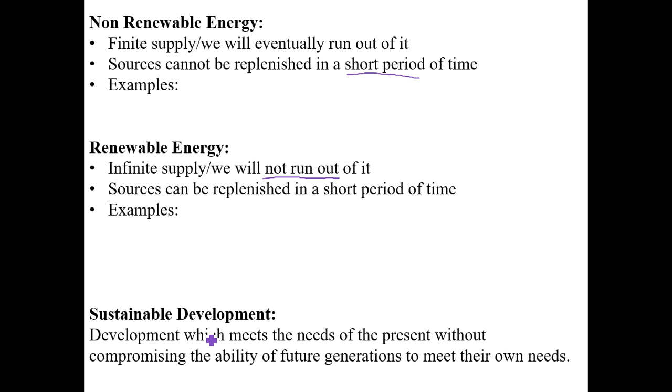The final term I have here, which is important for Science 30, is sustainable development. Development which meets the needs of the present without compromising the ability of future generations to meet their own needs. Here again, the primary focus is going to be in terms of accessing energy.

So what are the advantages of renewable forms of energy? We're going to go through a whole bunch of these, and I will also talk about biomass. These are going to be the advantages for all of these renewable sources of energy, except for biomass, that one is going to be a little bit different. The first one here is, yes, as we already saw, they are renewable, so we have essentially an inexhaustible supply of these energy sources to generate electrical energy.

There are no fuels and no fuel costs associated with them, and they are non-polluting. There may be some pollutants created when developing the technology, but in terms of emissions when electrical energy is generated, we don't see these chemical pollutants, including carbon dioxide. Remember, that is the major greenhouse gas, which is responsible for what most argue is the greatest environmental issue we have today, which is climate change. There are other greenhouse gases, but certainly CO2 is the main one we focus on. Through the burning of fossil fuels, whether coal, oil, or natural gas, there is CO2 released into the atmosphere contributing to the greenhouse effect and global climate change.

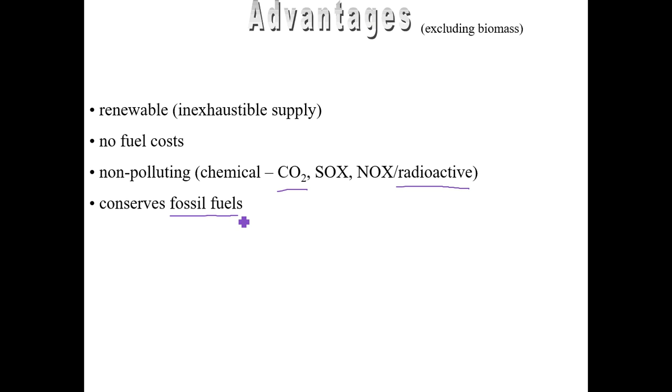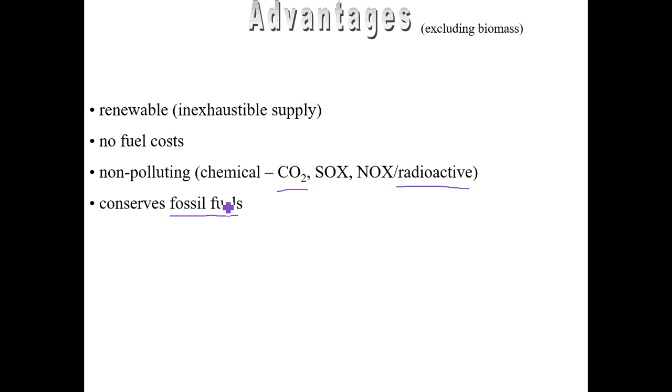Another advantage of renewable energy sources: fossil fuels and uranium are really important, concentrated energy sources that we have. If we could switch over to renewable sources of energy to generate electrical energy, that would conserve some of the fossil fuels and allow them to last longer, not just for us, but for future generations as well. Right now we can certainly use alternative energy sources for generating electrical energy and for electric vehicles, but there are still significant issues in terms of air transport. Right now, fossil fuels are really the only solution we have for air transport.

So we'll start off with geothermal energy. Geo refers to the earth, thermal is talking about heat energy. When the earth was initially formed 5 billion or so years ago, so the story goes, it began as a spinning nebular cloud, which was eventually pulled together by gravity, eventually forming the molten, very hot liquid earth. Since then the earth has been cooling off, but it still generates its own thermal energy through the radioactive decay of elements found in the Earth's core.

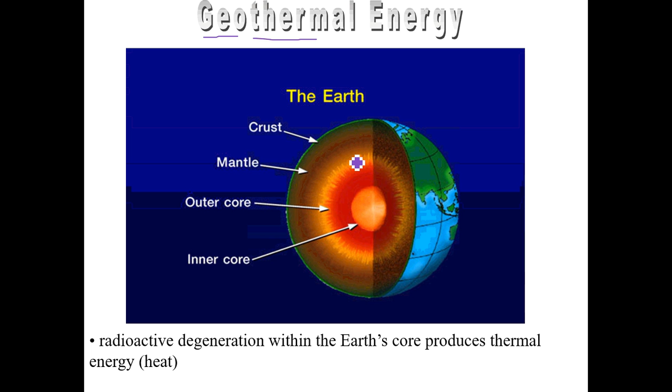Taking a look at this picture of the Earth cutting into it: on the surface we have the crust, which is solid. As you go deeper and deeper down, it gets hotter and hotter, going through the mantle, the outer and inner core. Below the crust we have liquid molten material at very high temperatures, and there's the potential that we can tap into this geothermal energy and use it to generate electrical energy. It is the radioactive decay of radioactive isotopes within the Earth's core, underneath the crust, that is generating and slowly releasing this thermal energy.

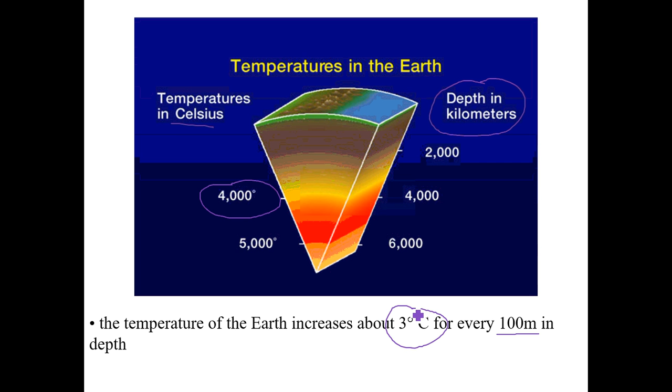This pie wedge shows the temperature of the Earth as we go deeper and deeper down in kilometers. At 2,000, 4,000, 6,000 kilometers below the surface, the temperature gets really, really hot—hundreds and thousands of degrees Celsius. The general pattern is that for about every 100 meters you go down below the surface of the Earth, the temperature increases on average about 3 degrees Celsius. So it gets hotter and hotter as you go deeper down below the surface.

We can see this visibly on the surface of the Earth at the boundaries between different tectonic plates. The crust of the Earth is made up of plates that shift around, and at the boundaries between these plates we can have the sliding of one past the other, one going up over top of the other, and the colliding and pulling apart of these plates. This shows many of the plates that make up the Earth.

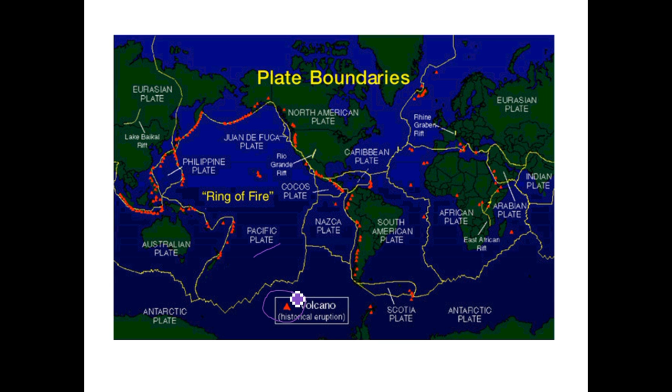If we focus on the Pacific Ocean, the Ring of Fire: this large chunk is referred to as the Pacific Plate, and all around the boundary we have other plates. Close to where we are, we have the North American Plate and the Juan de Fuca Plate. On the other side of the Pacific, the Philippine Plate, the Australian Plate. All of these plates interact with each other in various ways—sliding, colliding, subduction, all kinds of possibilities. When this happens, we can see the release at the surface of some of this geothermal energy. It's called the Ring of Fire because around this boundary we see a great deal of volcanic and earthquake, tectonic activity taking place.

So is there some way that we can tap into this very hot geothermal energy and use it to turn turbines and generate electrical energy as well? Well, there are some other possibilities as well before we get into the generation of electrical energy.

So it works something like this: rainwater, or it could be snowmelt, percolates down into the porous rock, eventually reaching very hot temperatures many hundreds or even thousands of meters below the surface of the Earth. As that water heats up, not only does it form hot water, but it can form steam as well.

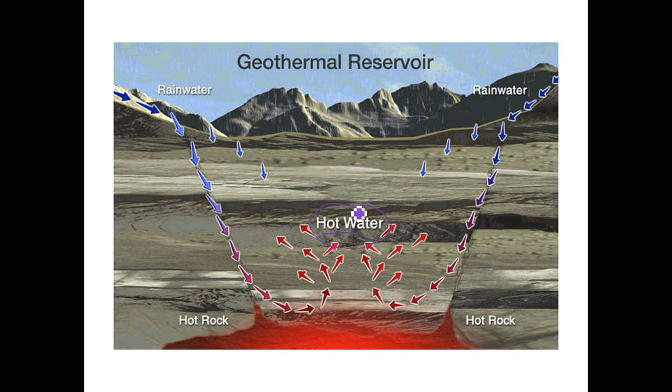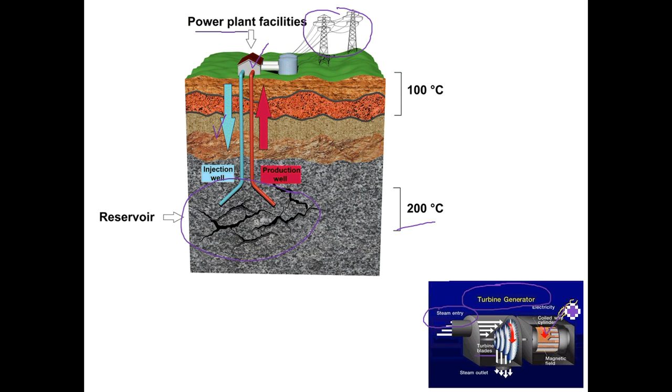But that doesn't mean we still cannot use this geothermal energy for something else. Even if we couldn't use it in Alberta to generate electrical energy, since temperatures may not reach high enough to convert that water into steam, we can still increase the temperature of water by pumping it down below the surface, having it circulate back up, and use it for things like keeping greenhouses warm in the wintertime above 0 degrees Celsius, or for aquaculture.

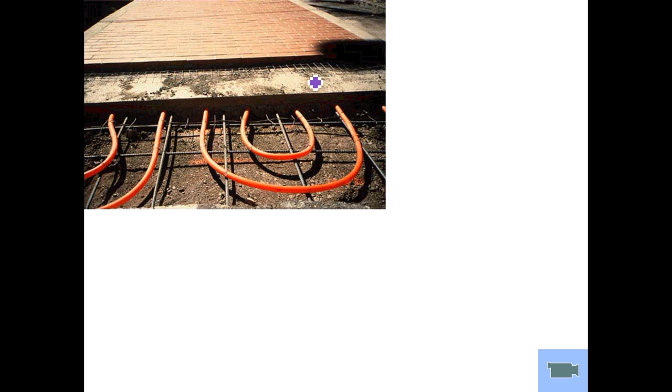It can also be used for in-floor heating. In this picture, it looks like this is outside, a driveway or patio, and what we have is PVC or plastic tubing going through the concrete. Circulating through that tubing would be ethylene glycol or some sort of antifreeze at a very high temperature, which might be enough to melt any snow and ice on this driveway, so you wouldn't have to shovel snow in the wintertime.

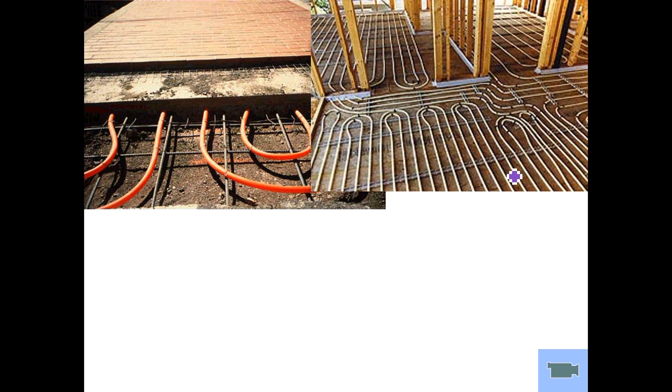It could also be used for in-floor heating inside of a house. Same idea here: we're looking at this house under construction, and before they pour the concrete floor or put finished floor on top, there's PVC tubing weaving its way through the subfloor. A liquid circulates through there at a very hot temperature, releasing that heat into the room and keeping it warm.

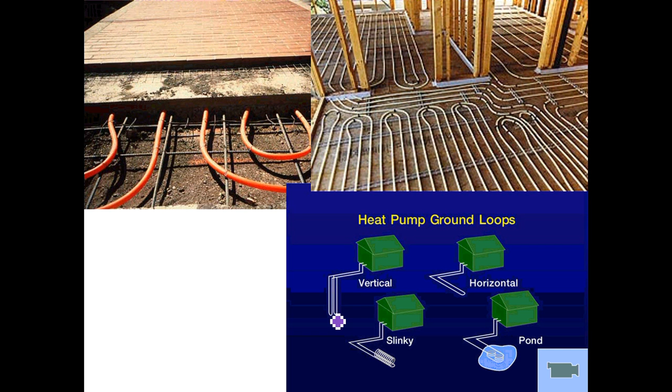So disadvantages of this, well, the major one really is that there truly are very few usable sites around the world where we can use geothermal energy and convert it into electrical energy. It would need to be very close to the surface and typically very close again to where we have those plate boundaries. And as we'll see with many of these, actually building the construction of a geothermal facility for generating electrical energy, huge cost associated with that sort of thing as well.

So the next one here is solar energy. So here, of course, we're talking about the energy that is coming from the sun. And in this case, keep in mind that energy coming from the sun covers a whole bunch of different wavelengths and frequencies of energy. Much of it is blocked out by the Earth's atmosphere, but we certainly do have the visible form of light that reaches the surface, infrared radiation, heat radiation that reaches the surface of the Earth, and some of the ultraviolet radiation that also reaches the surface of the Earth.

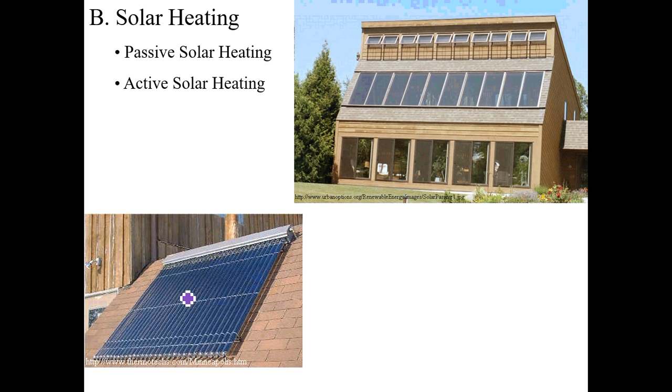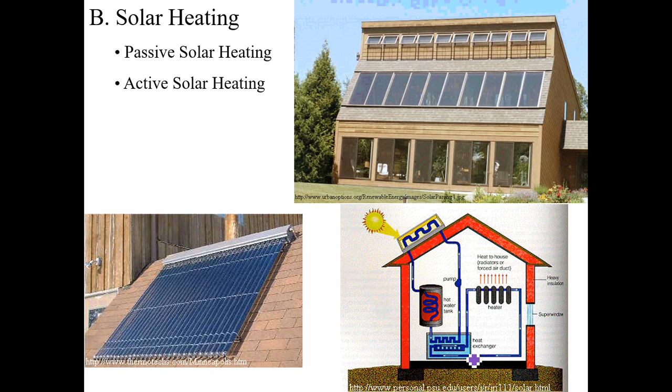Active solar heating. In this case here, instead of the glass windows, we have a whole bunch of black tubes. Black is an absorber of energy, and there's a fluid inside of these tubes that's going to be heating up. So if you use all of these tubes on the surface of the house—in this case it's the roof that's being heated up—then that fluid inside the tubes could be circulated through the house, perhaps through the in-floor heating, and used to heat up the house. So no energy conversion taking place here in terms of light energy into electrical energy. It's just directly using the heat energy from the sun in order to heat the house in this case.

Disadvantage of solar energy: the sun doesn't shine 24 hours a day. And if you live in a polar region, like in Canada, it's wonderful in the summertime where we have much more daylight, but during the wintertime, not nearly as much sunlight. Because the sun is so low on the horizon, it's not really the most efficient process in southern Alberta during the wintertime. Great in the summertime, but not so much in the wintertime.

Cost: there is a significant cost associated with the production of photovoltaic cells. Costs are going down all the time, but here in Alberta it's still much cheaper to generate electrical energy using other sources. There is also a large surface area of land that is required in order to set up all of these solar panels to generate a sufficient amount of electrical energy.

And although I don't have it here, there are no chemical pollutants generated by using solar panels, but that doesn't mean in the production of solar panels that there aren't some chemical wastes that are generated, and yes, that is the case.

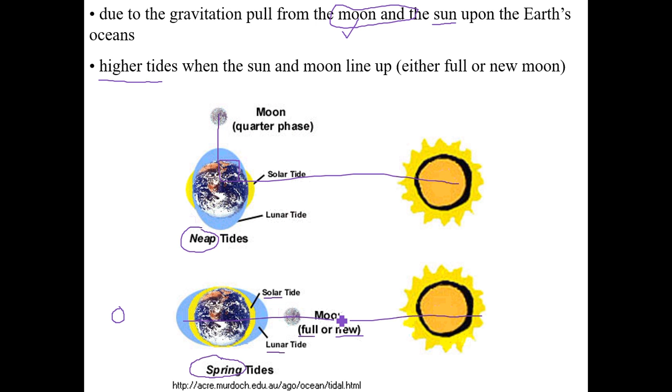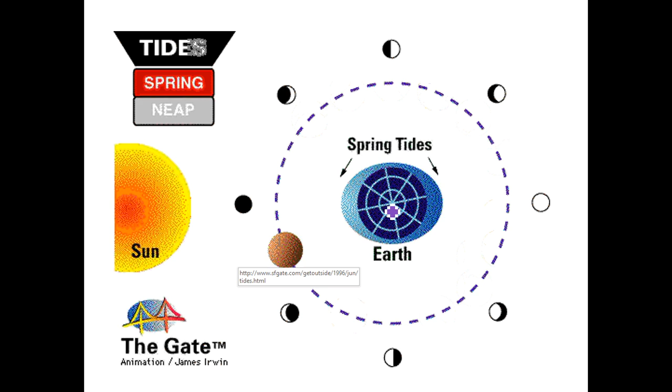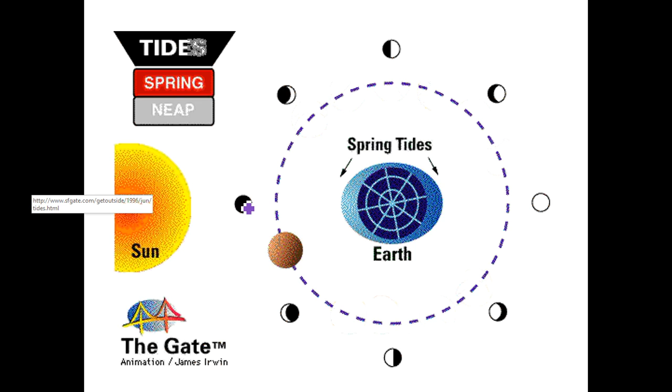That's what it's showing in this fairly simple animation here. Again, don't worry too much about the actual terms, the spring tide and the neap tide, but if you take a look at the picture in the middle, when we see the bigger bulges on either side, that is representing the larger tides, and that is when we have the sun, the earth, and the moon either in this location—a large tide—or this location here, a large tide.

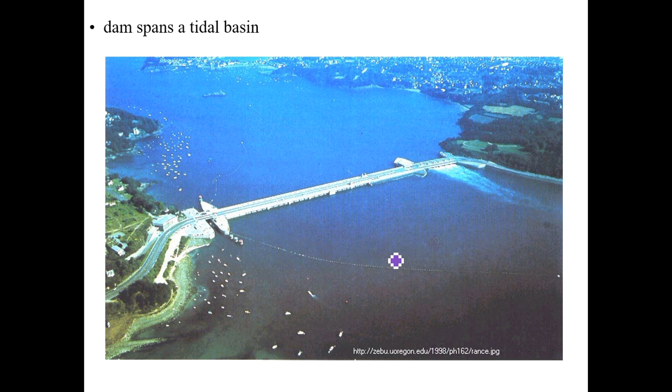To produce electrical energy this way, there aren't a lot of great places around the world where you can do this, but what you need is a dam or barrage going across an inlet or bay. In this picture, the sea or open ocean is at the upper left, and the bay, estuary, or basin is at the lower right. This shows how it would work, with the barrage or dam going across the basin, and the open ocean or sea at the left-hand side.

When the tide is high and goes up, the sluice gates in the barrage open and allow water to flow into the basin. Then they close off the gates, and the sea level goes down over the next few hours. Now we've held the water in the basin at a higher level, so we have gravitational potential energy, and it wants to go to the lower level. But the only way it can get there is by passing through the turbine.

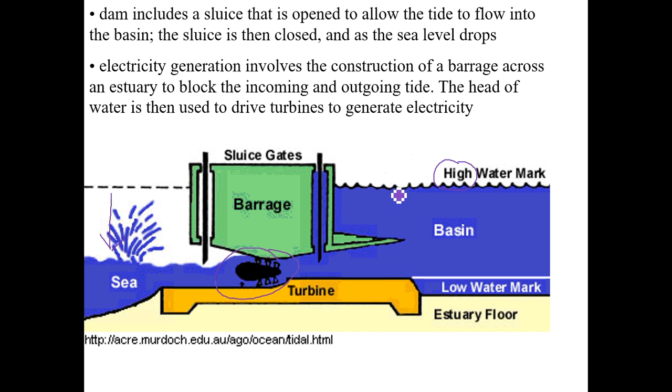So we open the gate, allowing the water to pass to the lower level. That turns the turbine, which is connected to an electrical generator, generating electrical energy. But this only happens as long as the water is at a higher level in the basin than in the sea.

In fact, we can have this working in both directions. We close the sluice gate when the sea level is going up, and once it reaches its maximum height, we open the gates, allowing water to pass through the turbine into the basin, bay, or estuary, turning the turbine and generating electrical energy. Then once the levels are the same, we close the gates again, wait until the sea level drops, and once it's at its lowest level and still lower than the estuary, we open the gates again and allow electrical energy to be produced. So this only happens twice throughout the cycle, and it's not continually generating electrical energy.

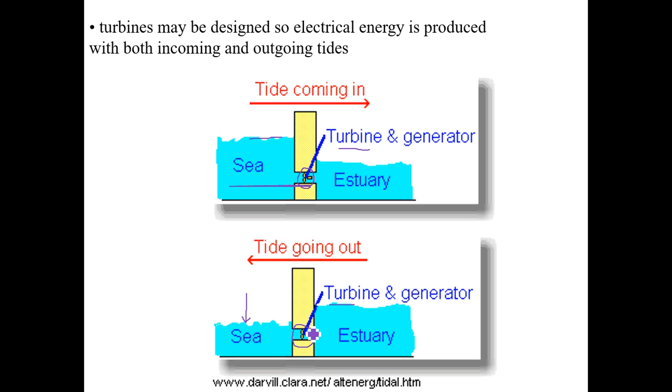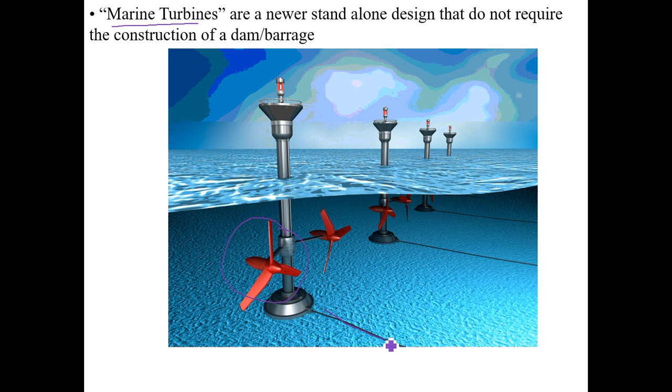So it's not quite as disruptive on the environment as having a dam going across a bay or estuary. But even so, there are very, very few good locations around the globe. One of the best in the world, where we have the greatest difference between high and low tides, is here in Canada, in the Bay of Fundy in eastern Canada. But electrical energy is only produced for short periods of time, when the tide is changing. Constructing these disrupts the aquatic environment and shoreline ecosystem, and there are really high construction costs associated with generating electrical energy this way.

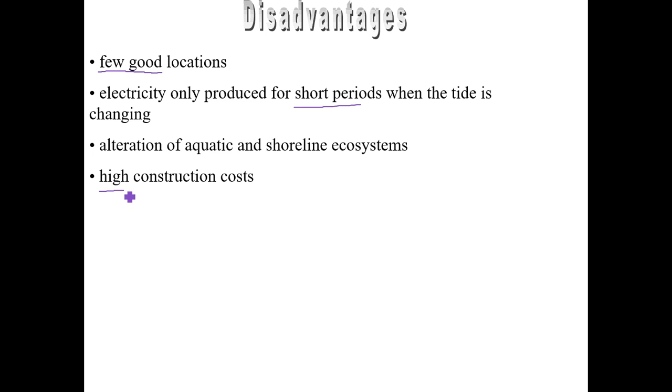Wind power is a big one, and definitely a big one in Alberta. We're seeing more and more of this all the time, and we'll look at some stats in the next couple of slides. The winds are generated by the sun as well, through the heating up of air leading to its movement. If you think about the globe, the greatest solar radiation is near the equator, and the least is closer to the poles. This uneven heating, along with the rotation of the earth, is what generates the winds.

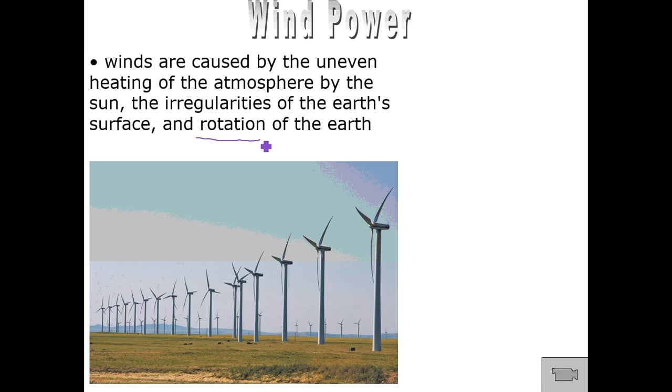A wind turbine, like we see in this picture, is an enormous structure. They work the opposite of a fan—a fan uses electrical energy to turn the blades, but here we use mechanical energy, the kinetic energy of the wind, to turn the turbine blades, connecting it to an electrical generator to produce electrical energy. These structures stand many tens of meters in height, and each blade is absolutely enormous. If you think of very large airplanes, each blade is the size of, or even bigger than, the length of a wing on one of those airplanes.

So here in Alberta, what we do have right now is about 38 projects that are currently underway or functional. Each megawatt is sufficient, on average, for about 1,000 homes. The capacity we had in Alberta as of December 2019 was 1,685 megawatts, with a little over 200 new megawatts added in 2019, totaling almost 1,000 wind turbines in Alberta.

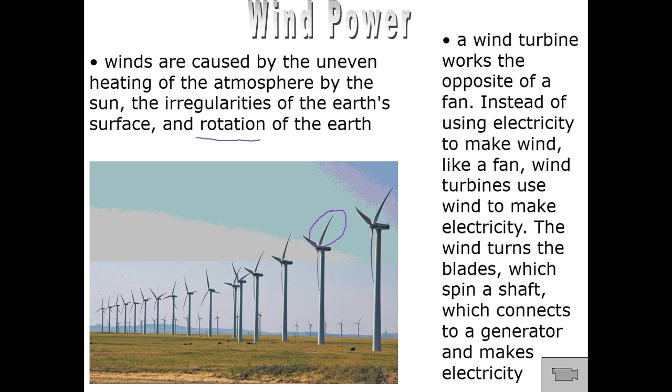Again, 1 megawatt is sufficient for about 1,000 homes, but keep in mind that's only when the wind turbines are turning, and that's not always the case—only when the winds are blowing. In southern Alberta that's often the case, especially in spring and fall, which is why most of these wind farms are located there.

So the wind, unfortunately, is inconsistent—it's not generating electrical energy 24 hours a day. You're dependent on when the wind is blowing, and that's the only time electrical energy can be generated. It's not the kind of thing that can be stored. At least we don't have the storage capacity for that wind energy, so even though a lot may be generated when the wind is blowing, we can't store it for when the wind isn't blowing.

If you're below one of these wind turbines while it's turning, they can be fairly noisy—the newer ones not quite as noisy as the older ones. If you drive through southern Alberta, the western part especially, you'll see beautiful scenery with the foothills and Rocky Mountains. Not everyone likes seeing wind turbines interfering with that view—even in this picture we can see some of the foothills and mountains—and some people consider that visual pollution.

Hydroelectric power is huge in Canada as well, although not so much in Alberta. Hydro refers to water—specifically the flow of water, using that kinetic energy, the movement of the water, to generate electrical energy. This is very similar to what happens in a traditional electrical generating station, whether using fossil fuels or uranium in a nuclear power plant, only in this case it's not high pressure steam turning the turbine—it's just the flow of water.

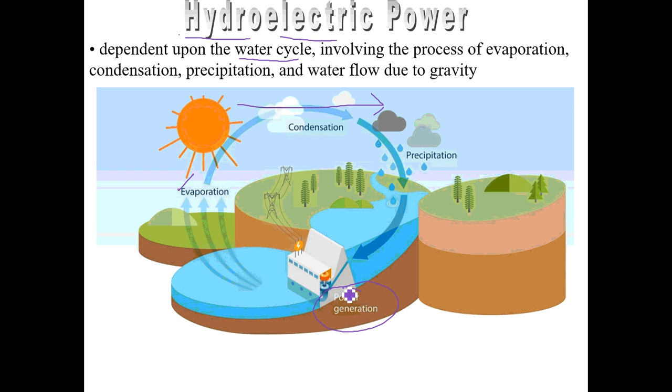It's dependent on the sun, because the sun drives the water cycle. The sun causes evaporation, primarily in the oceans, and as that water evaporates, winds move it over the land to higher elevation. Then as it flows down from higher to lower elevation, gravitational potential energy leads to kinetic energy—the movement, the flowing of the water. As that water flows past a turbine in one of these generating stations, that's used to generate electrical energy. There are many, many different examples of this.

So essentially how it works, at least with the traditional ones where you have a dam, is you interrupt the flow of the water by building a dam. That prevents the water from flowing from the upper part, the river, turning it into a lake or reservoir that is now held behind that dam.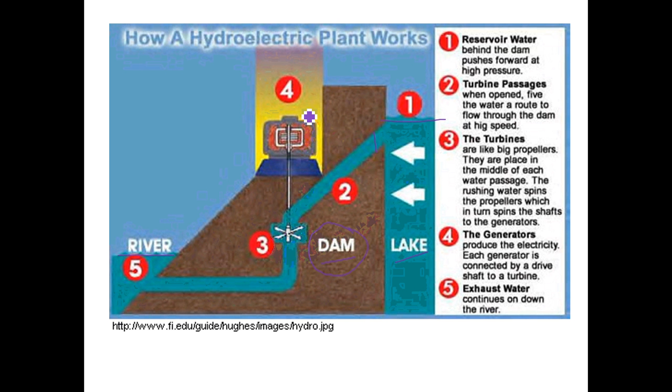So when you need to generate electrical energy, that's when you open up and allow the water to flow down to the lower level. We do have gravitational potential energy, because level 1 is much higher than level 5. It wants to go to the lower level, and as it does, that kinetic energy is converted into the mechanical energy of turning the turbine, connected to an electrical generator, generating electrical energy in the process.

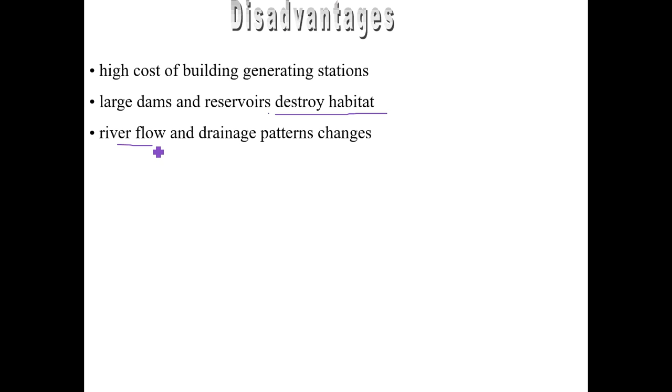Disadvantages, and this will fit into the economics as well: once again, an enormous cost in building, especially the very large electrical generating stations using hydroelectric. Large dams and reservoirs destroy habitat, you're flooding a very large area, converting that terrestrial habitat into an aquatic habitat and destroying the riparian area, the area along the river or stream. This can also change river flow patterns and drainage patterns, so really significant impacts on the ecosystem.

Biomass energy has some connections to fossil fuels because we are burning the biomass and using that to typically boil water, generate steam, and turn a turbine, similar to a traditional fossil fuel electrical generating station. There's also a similarity in that carbon dioxide is produced and released into the atmosphere, but there are some significant differences. The big difference is this one can be replaced on a human time scale.

Energy is produced by release of stored chemical energy that we have in biomass. We are using it to generate electrical energy. It can also be used just to generate heat, and also liquid fuels that can be used in vehicles, for example. So this is the way it works.

In this example, what we have is a planting of a crop. That crop, whether we're using the crop directly or the waste left over from it, is the biomass. We can use this biomass in an electrical generating station to burn, and it releases heat, used to boil water, generate steam, high pressure steam, turn the turbines, and generate electrical energy. But again, we have this waste, carbon dioxide, that is produced just like fossil fuels.

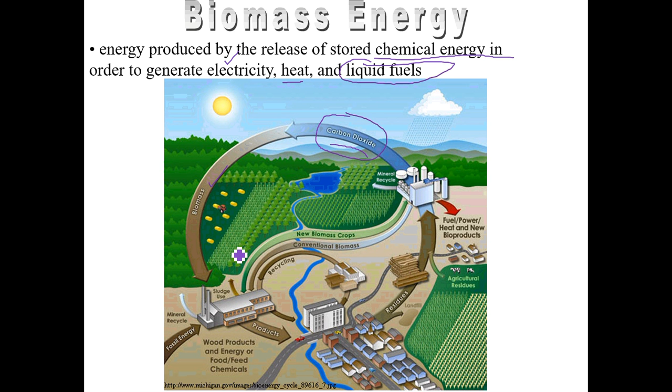The difference here is that by planting crops, plants take in carbon dioxide. So whatever carbon dioxide was released is captured again by plants and used for the growth of the plants. So even though carbon dioxide is released, completing the cycle will once again remove it out of the atmosphere, which is not the case, at least on a human time scale, when we're talking about fossil fuels.

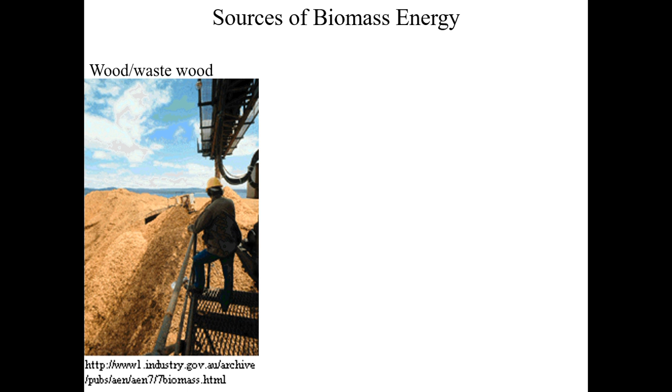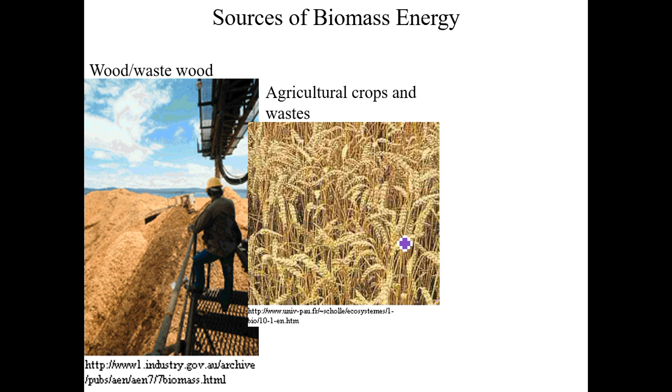So what are sources of biomass energy that we could use? Wood waste could be used. Agricultural waste, too: in the picture we have here, whether it's wheat or barley or rye, it's only the grain that we use for food, but the rest of it, the stalk, is agricultural waste that could be used. Animal waste could also be used for biomass, and municipal waste.

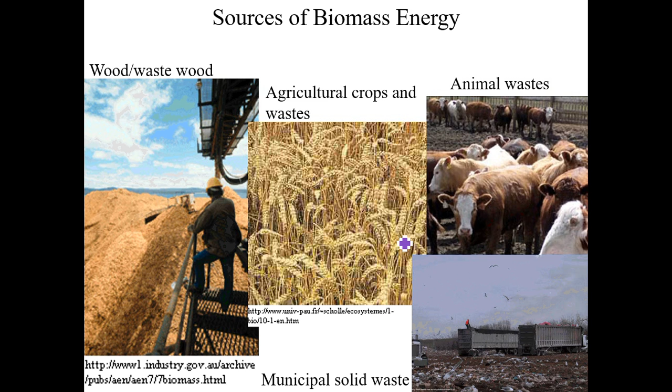So it might look something like this: we take the biomass, and we can use bacteria, aerobic and anaerobic, to gradually break it down. That could release hydrogen and methane, which itself could be used in combustion reactions to release energy.

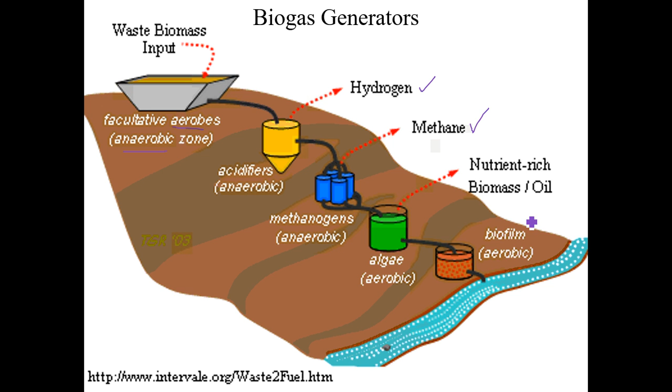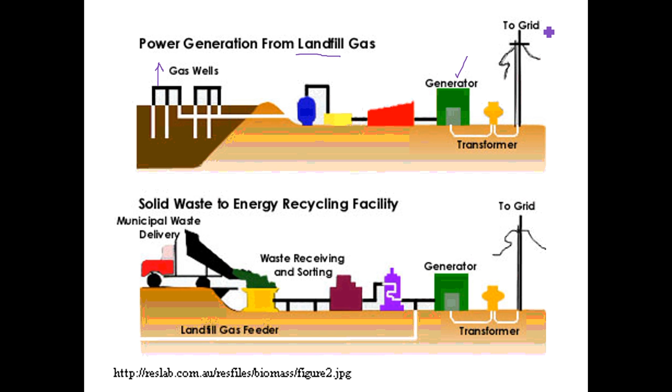For a landfill, underneath all of that waste is being broken down by bacteria, releasing typically methane gas. So instead of releasing all of that methane into the atmosphere, which is an even more potent greenhouse gas than carbon dioxide, can we collect it and burn it, use it to turn a turbine, connect it to an electrical generator, and generate electrical energy? They are doing this sort of thing in some other cities, including Edmonton, with their landfill waste.

One of the drawbacks, of course, is that this is food. So now we're using food, which could be used to feed people, for something else - to produce a fuel. The nice thing about it is this biomass is renewable, whereas fossil fuels are non-renewable, because we can just plant the crop again and generate more of that biomass.

We can also use, for example, a deep fryer - the oil used for deep frying can also be used as a biofuel in some vehicles that have been converted to use that as a fuel source.

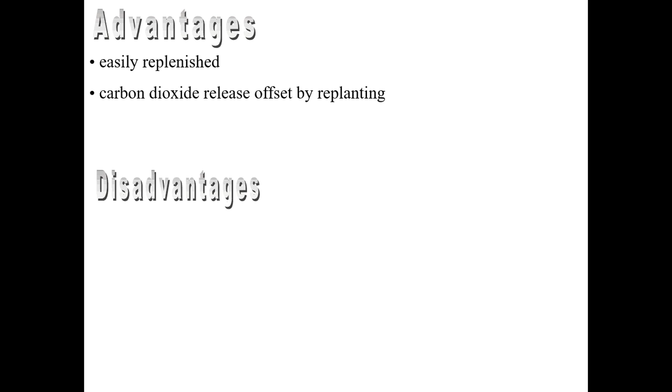Advantages: it can be replenished. Carbon dioxide is released, as with fossil fuels, but we can offset that by replanting crops. Disadvantages: it does still produce emissions, and it can lead to the planting and overplanting of crops, leading to soil depletion due to overuse.

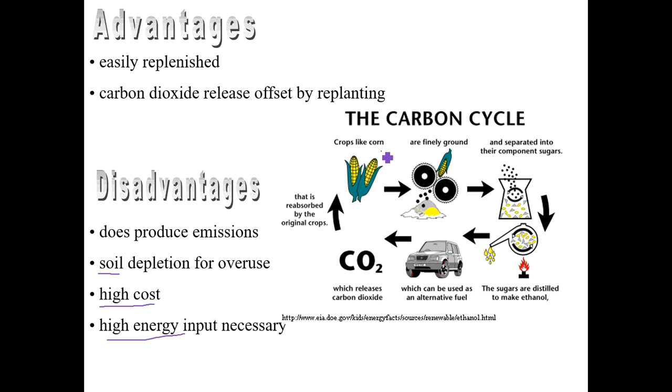Huge costs, and this is maybe the big drawback. In fact, we talk about a negative energy return. It costs more energy, or more to generate the fuel than what we would typically get out of it. A huge amount of energy needs to be put into taking the corn and converting it to ethanol than what you would get out of it. Negative energy return is what we talk about.

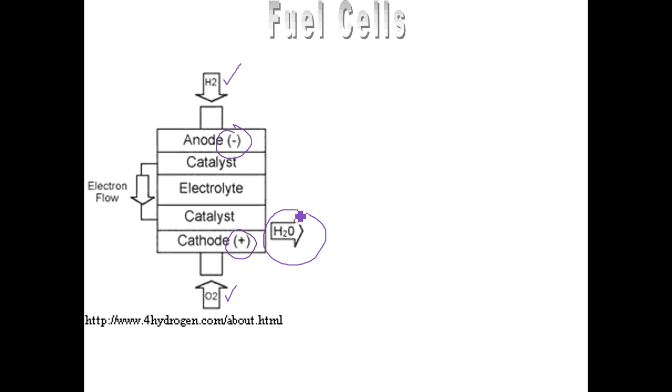Just a little bit here on fuel cells. We also hear a bit about fuel cells - it works again as an analogy to a battery, or to what we saw previously with the solar panel. What we have is a separation of charges, negative charges here, positive charges here in a fuel cell. In this case, the fuel going in is hydrogen gas - we'll see where that can come from - and oxygen just from the atmosphere. The only thing being produced is water, so we have no chemical wastes being produced, at least by using fuel cells. Only the water is generated. This is showing one of the wafers that would make up a fuel cell.

Possibly using them for transportation - some buses are now using fuel cells, and potentially other vehicles as well. So the sources of hydrogen - where can it come from? From the splitting of water. Electrolysis of water can generate the hydrogen, which is nice as long as it's coming from renewable resources. But if you're using fossil fuels for the electrolysis, then you have a whole bunch of emissions coming from burning those fossil fuels. So yes, if we are using fossil fuels, then we do have carbon dioxide emissions associated with that.

Other problems are related to the storage and transportation of hydrogen. Infrastructure is not in place for storing and distributing hydrogen to vehicles, for example, and there are definitely fuel tank size limitations - they need to be much, much larger than for a liquid fuel.

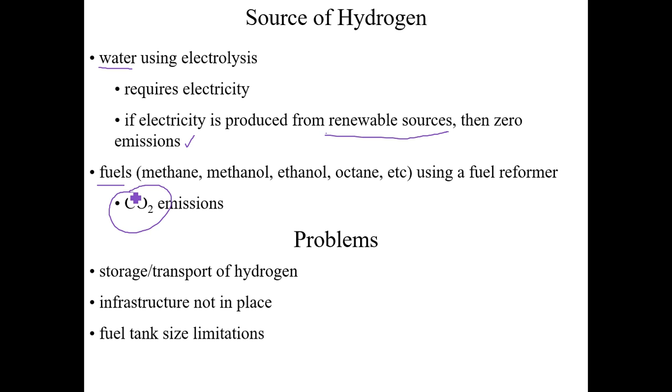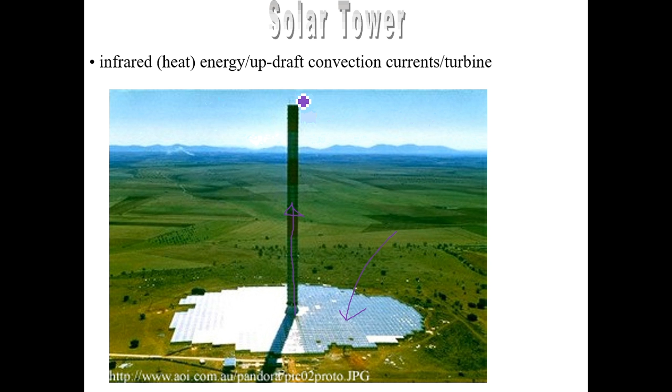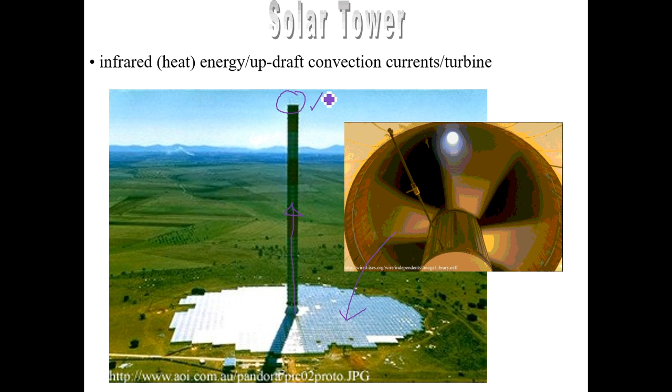Just an interesting one here - this is a solar tower, many tens of meters or even hundreds of meters high. All these glass panels at the bottom form essentially a greenhouse. Solar energy comes in and heats up the area inside that greenhouse, and hot air rises, going up through this tube that we see here. At the top we would have a turbine, so that hot air rising up would turn the turbine, connect it to an electrical generator, and again use that to generate electrical energy. This is the turbine we see spinning at the top there.